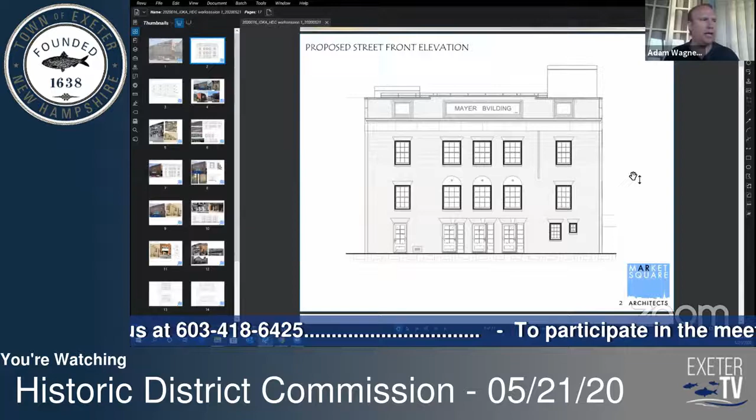Here we have a simple dimensional drawing. This is the proposed elevation for the redeveloped building. I'm going to get into the nuances of what's different between this elevation and what's existing now. We'll also be talking about some things existing now that we don't believe are historic to the building, and that we'd like to bring back to their original grandeur. So here's the proposed elevation. As I hope you can recognize, we're not talking about doing anything outlandish with this building. It's really one of those buildings that we found the particular detailing of certain elements, and I'll be getting into that in further detail.

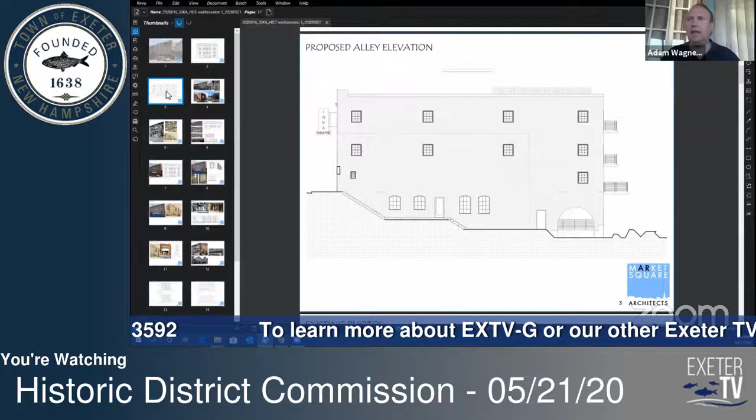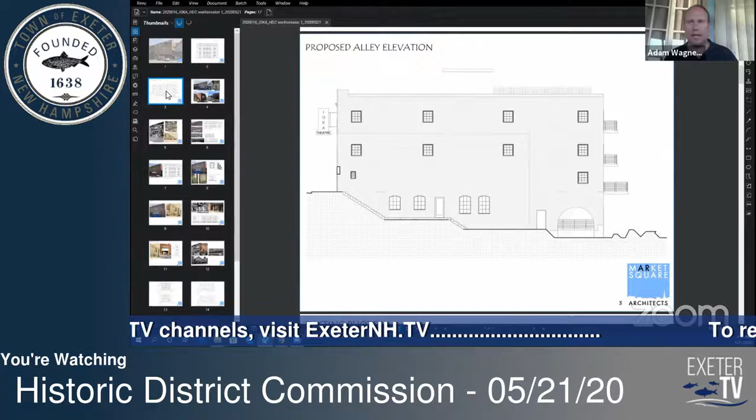With that, I'm going to move to the second elevation. Just to the right side of the building, there is a very narrow alleyway that gets down to the river, and this is the elevation of that alleyway. It's certainly not a prominent elevation of the building, but it can be seen from the street, and we are proposing some changes there. This slide illustrates what those proposed changes would be. Again, I'll be getting into all of this as we move through the presentation.

So slide 4 here, just for reference, these are some existing photos of the building, taken within the last week or so. Masks on, we've had boots on the ground there. As you can see by the dumpster, there is some demolition work going on inside, and we're using this time to really try to get our arms wrapped around the intricacies of this building. There are some unique things that we've discovered.

I'll talk about those shortly, but just to give you a reference point to this whole project, this is the front elevation. This is a view down in the alleyway, actually the lower level of the alleyway, about halfway between the street level and the river level. It can certainly use some cleanup. And lastly, we've got some photographs of the back of the building, really just a blank brick facade with this bump out here.

The next slide I'll show you, these are some of the historic photos that we've been able to find of the building. And with this building dating back 105 years now, certainly it has gone through some variations over the years. And we've been taking a very close look at any photographs we can to try to understand the difference between what may be there now and what was original to the building. And I will be getting into that in some more detail shortly.

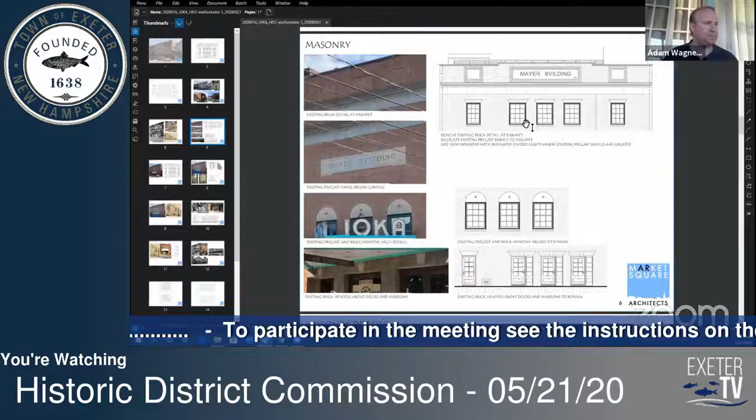The next thing I'm going to move on to is, actually, where was I? There I was. Now we're jumping to here. So again, now I'll pull back up that front proposed elevation. This is the existing photo.

This is our proposed. So in order to get windows here on the third floor, as I said, we would look to take these precast elements and move them up to the parapet level and rebuild those pieces. There's quite a bit of water damage in the parapet. A lot of that is going to need to be repointed anyway.

And the new windows that we're putting in, windows that would be consistent with the original windows of the building. And I'll get into that in the next couple of slides here in terms of what our research has shown us about those existing windows. But the first part here was specific to the masonry. And with that, I will jump into the windows.

So right now there's a bit of a hodgepodge on the building. We took a look at what's there. And over here, you've got a 6/1. Down here, we've got a 6/6. Here, we've got a mulled 2/2. So really, we wanted to get back to the point where we had a better understanding of all these things, what's original. And with that, I'm going to jump ahead a slide and then end up coming back to this.

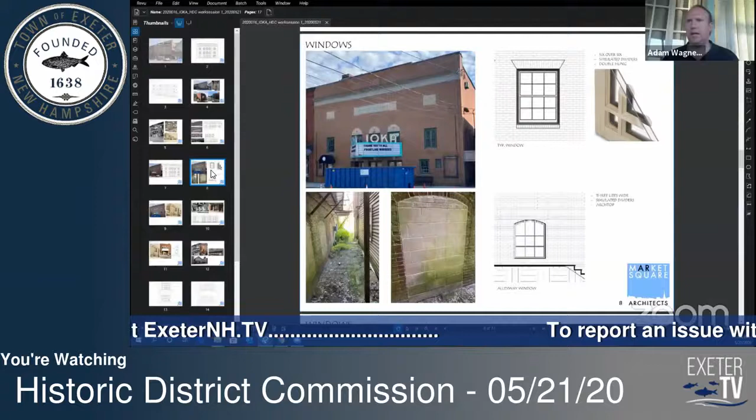So going back to where I was, our proposed solution to this is replace the existing windows with 6/6 windows. And what we would propose to do is a simulated divided light. These would most likely be a fiberglass window. But instead of doing single hung, which is what we think the originals probably were, we would propose to do a double hung here. And the reason for that is with the simulated divided lights, the windows get dirty pretty quickly. And with a double hung window, it's easier to wash it.

So from an aesthetic standpoint, you're not going to notice a big difference. From a functional standpoint, we can keep the windows cleaner for a longer period of time. The other thing I want to point out here on the window slide is down here in the alleyway, you can see these arch top CMU openings. We don't have any great historical photos from down here, but we believe these were all windows at one point.

And so our proposal would be to take this CMU block out of those openings, use the existing headers, you see the archway right here, and put new simulated divided light windows in their place. We haven't been able to document its existence, that that is what was originally there. But we think common practical architectural sense tells us that that was the case. So really we're trying to bring back as much of the original as we can in regards to the windows.

And yet at the same time, we do need to cut some new openings because of the function that's being proposed on the inside. And the predominance of that is here on the third floor level, some in the alleyway facade, and then certainly on the rear facade of the building. And I'll be getting to that in the slide shortly. So this I already discussed, the existing windows that are here now, the originals and what we believe they were. And with that, I'll roll into the doors.

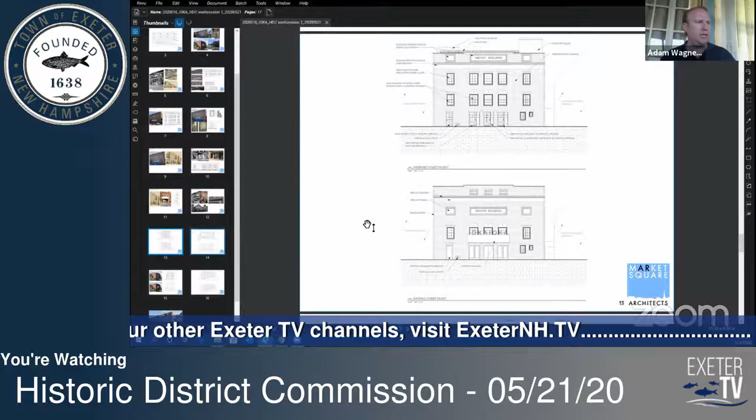So with that, get back into drawings here. And this is just as a comparison. So here's the current facade of the front of the building. Things to note, the marquee sign here, the IOKA lettering above, the Mayer Building precast here on the third floor with these flanking precast items.

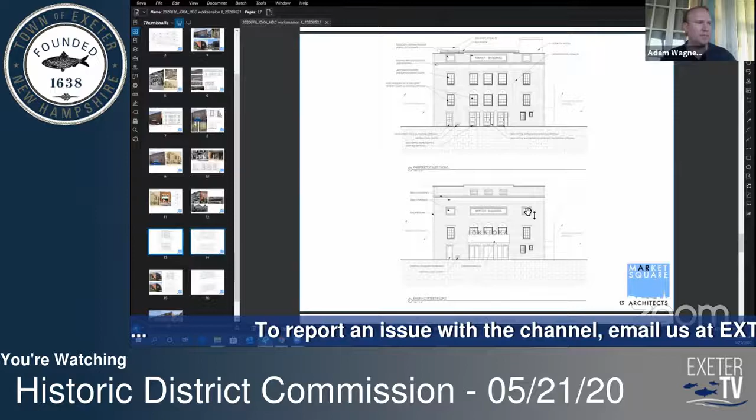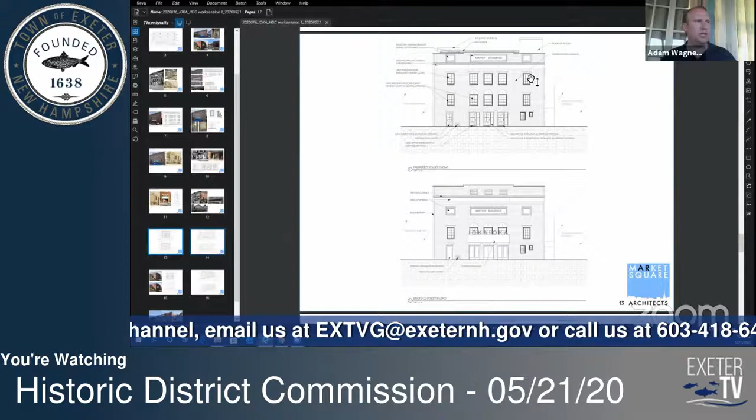And again, we're looking to take that piece, move it up to the parapet level so that a new collection of windows can be added here on the third floor. And again, all of the windows will be brought back to 6x6 simulated divided lights. And we already talked about what we were proposing for the doors.

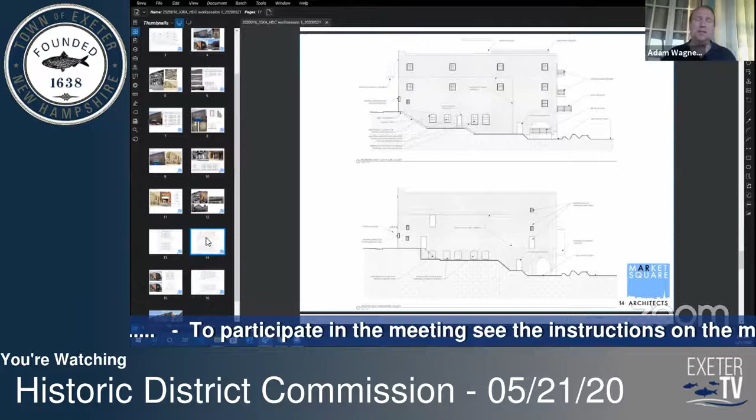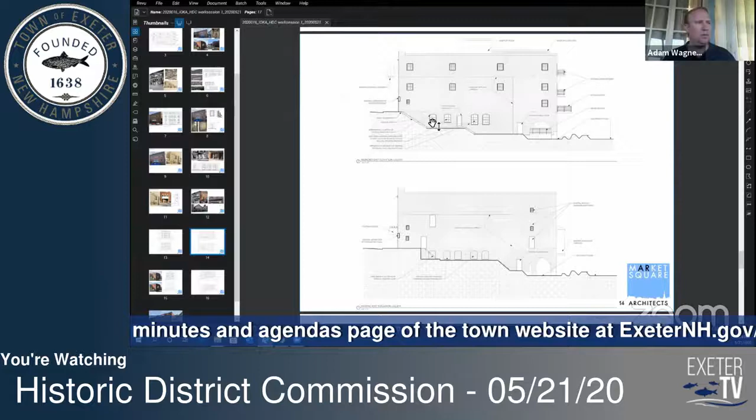Next elevation I'll show you, this is the alleyway elevation. So the two buildings are only 4 or 5 feet apart. You really never get to see this view just because you can't get far enough back from that facade. These are those blocked in arched openings that I had talked about. We're looking to open those back up, turn them into windows again.

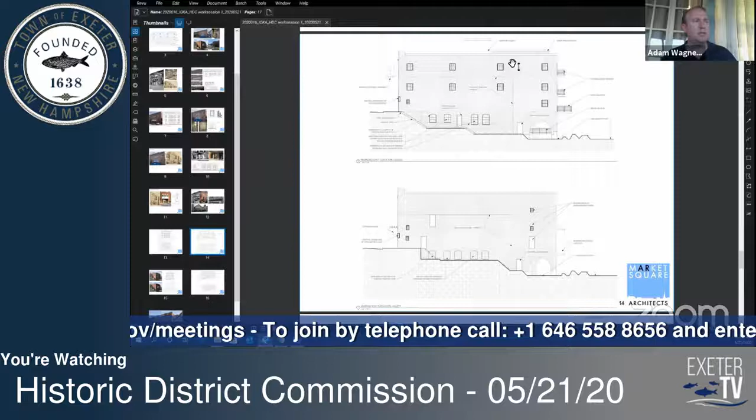The rest of this facade is really a blank brick wall, as you can imagine a theater building would be. And based on our new function, we are looking to put some small windows in here. Again, they would be 6x6 simulated divided lights to replicate the windows on the front.

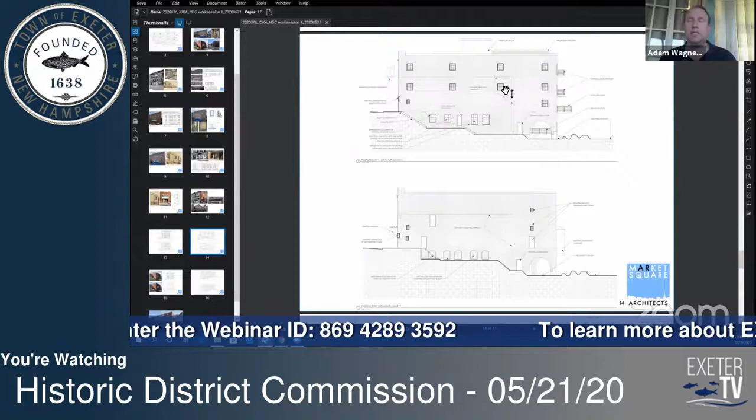But we would propose not to do the masonry detailing on this facade in the way it's done on the front facade, because had these windows been constructed when the building was, we don't think they would have done that brick detailing the same way. Just like they used a less expensive brick to wrap the sides and the back of the building, we don't think they would have used those masonry detailings for the window headers and that sort of thing.

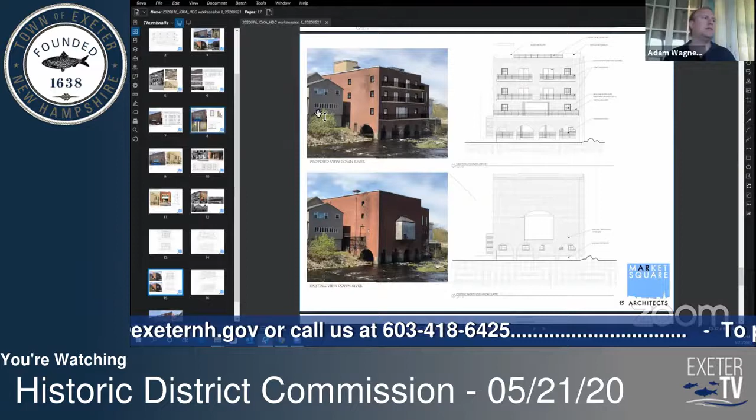Next facade I'm going to share with you is the back facade. So here's the rear of the building. And as you can imagine, with a theater with a fly loft, not a lot of need for windows back there. There is this wood frame bump out that was added to the building. And based on our function and what we've seen on other buildings along the river here, the glass on the other buildings and the outdoor balconies is much more celebrated because it was functional for those buildings, whereas for a theater building, it wasn't functional at all.

But based on our proposed uses on the inside, we're proposing to build some decks off the back, put in sliding glass doors, and again, windows that would be consistent with the other new windows we're proposing for the building. This area here is actually the opening for the bump out, so there's no brick in there. We're proposing a little bit larger piece of storefront glass, and that ties in with the first floor proposed use.

And the openings there, the headers there, we just think it would be a nice option to really create a beautiful indoor space coming out to that deck. Here we have existing elevation, proposed elevation. And with that, I will move to the next slide.

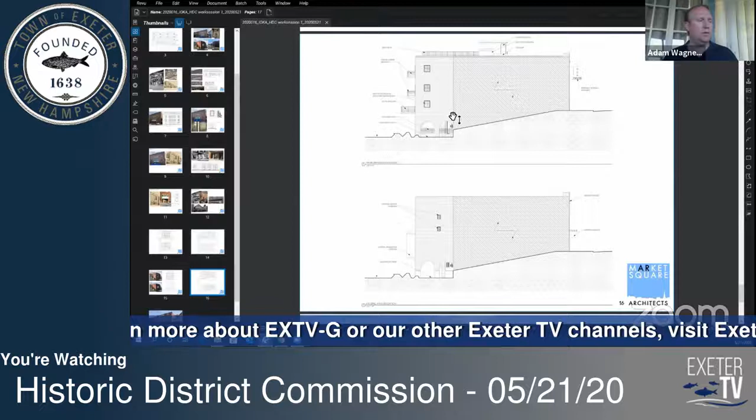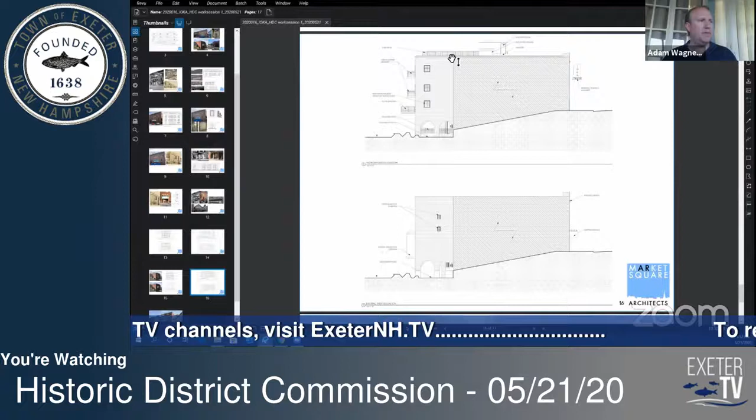And this slide is the other side of the building, opposite the alleyway. There is a building that shares a party wall right here, so that's where you see the hatched area. So the only portion of this facade that you see is this piece right here. I think you're not going to see it in the other photo.

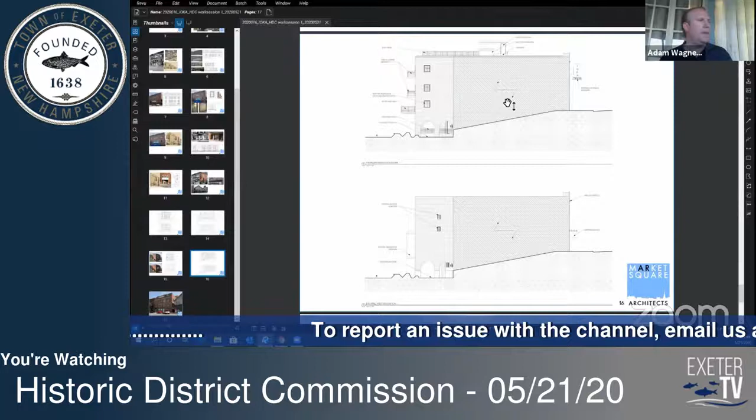So again, there are two tiny little windows here, which are basically backstage windows. And we would be proposing to put in more functional windows, again, with the detailing of the window and masonry that's consistent with the rest of the backside of the building. Here you can see these decks.

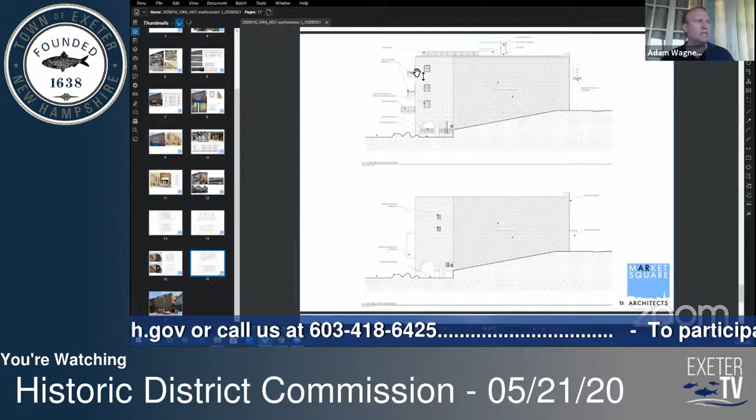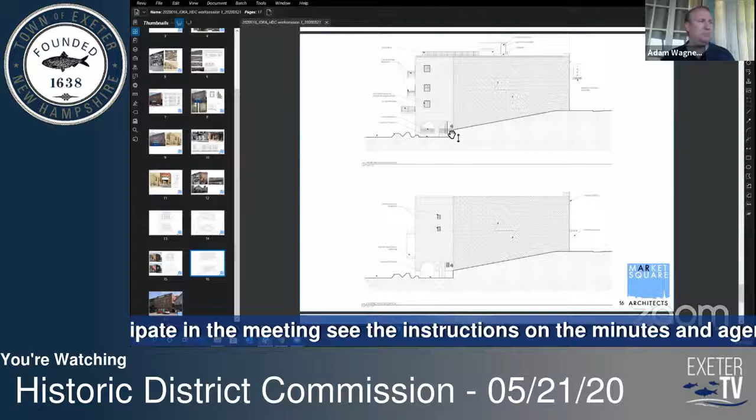We are looking at putting something in the archway down here because it's really cool space and we think we can make it functional. And I think on a night like today, it would be a beautiful spot to sit out right by the river and have the water flowing right by.

And then lastly, I'm just going to leave you again with the overall proposed facade of the building. All the components that I talked about in the last 16 slides here: moving the precast up to the third floor, replicating windows on the third floor to match up with what's on the second floor already, replacing the doorways on the first floor to go back to something that's much more historic, putting something back in that's much more reflective of the original sign of the building. And we don't have it shown here, but we're exploring what our options could be for that canopy.

With that, I'll hand it back over to you, Mr. Chairman. We'd be more than happy to answer any questions that we can, and love to hear your thoughts and feedback. And I will leave this up so that if anyone wants to flip to a particular slide, I can do so.

Okay, thank you very much for that presentation and for leaving it up. I'm hoping that others, if they were taking notes during this, were referencing their comments by slide at the bottom there of 17. And what I'm going to do is call on our commission members for comment or questions for the applicant by going through.

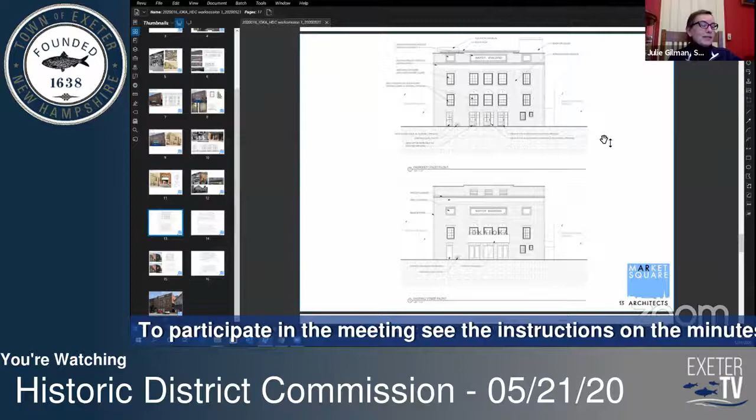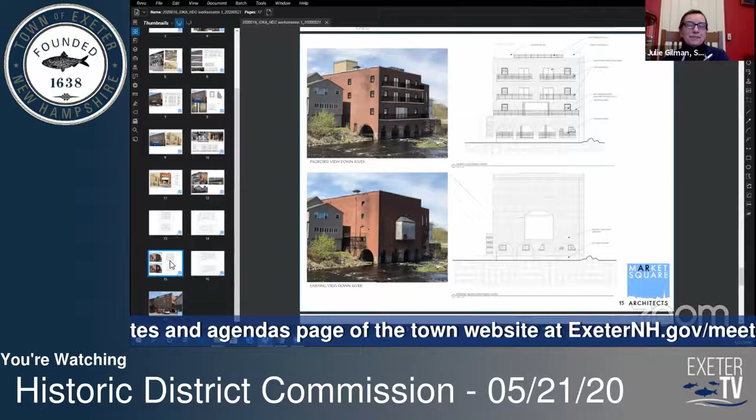And on the back, if you're going to use the bottom level at the river for a deck, et cetera, you're going to block the air conditioning. That's how the building was air conditioned, from ducts from that lower section. That's why the sign that used to hang on the marquee said air conditioned; that's how it was, sucking up cool air from the river.

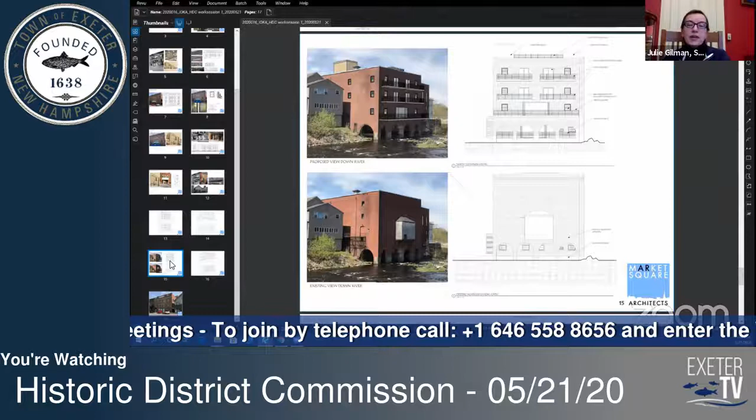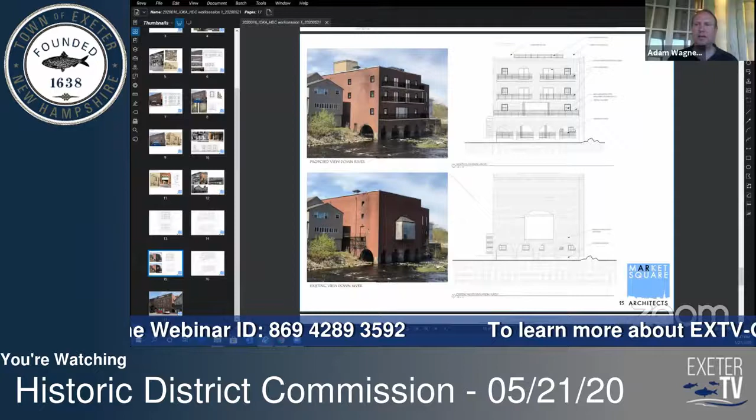But that brings me to a question which is not, again, in our purview. I'm just curious. Are you going to be disturbing the riverbed at all so that the Army Corps of Engineers has to get involved? So that's a question, I think, for Adam. Yeah, I'd actually like to defer to the development team on that, just because I'm not a civil engineer. I don't believe that is the intent to disrupt that. Sure. But if one of them could jump in, that'd be great.

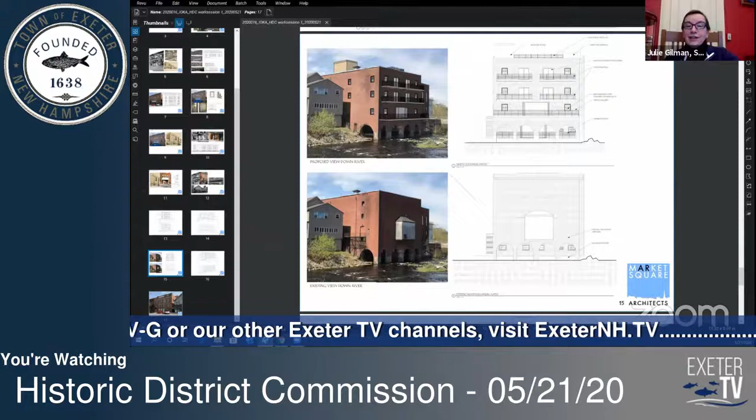Yeah, no, I'm sure it's not the intent. I just want to be sure you're aware that if that's going to happen, there's another layer of stuff you're going to have to go through. I think that's all I have for right now. I appreciate the work that you've done, and the side elevation is what it is, really. It wasn't ever meant to be a showy piece, and you're going to use it in the way it needs to be used for your use.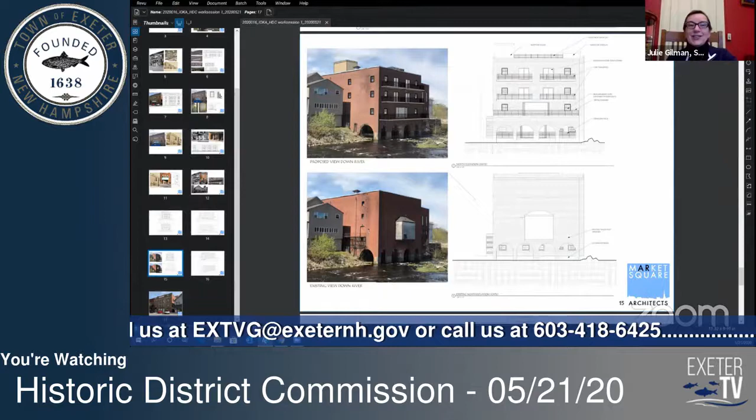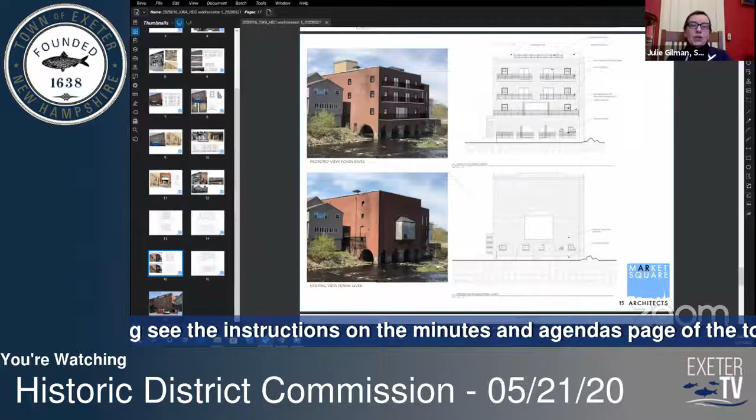So thank you. And I also do have the concern about the head height of the either elevator or stairway or HVAC, whatever's going up on the top there. We've talked about that with many properties along the riverway because of the view from across the water, that we want to see it screened, whatever you're putting up there, HVAC or whatever, that it's either screened or a color that blends with the sky, something that diminishes its bulk. And that's it. Okay.

I believe that's everyone that we've got on the board. So I'll take a few minutes to make some comments and questions. First one I have is a question for Adam and the development team about the construction sequencing of removing those precast panels. I assume that the only way to do that is going to be to jackhammer those out around the existing brick facade that's there, to destroy the rowlock that's there to get that panel out and removed. Is that the thought behind that?

I think they can probably be saw cut out without hammering. Anytime you're introducing that level of vibration into a mix, you're asking for trouble. So I think, we haven't gotten into the detail of that, but I think a masonry saw could probably be used. As you can see, the Mayer building sign is actually 3 panels already. Mm-hmm. You can see small joint lines here and here. So we're going to have to be very careful with how that's done, but that's really getting into construction means and methods.

Yeah, the question behind that would be that the preservation of the panels is obviously preferred, and we appreciate that. The manner in which that's done, not marring or scratching or cracking so that the panel then has to be recreated, would be to the detriment of the elevation, I believe. So I just wanted to bring that up in comments.

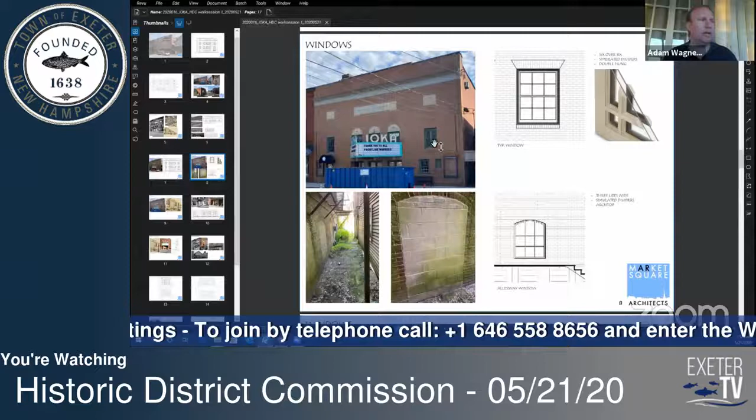If that isn't going to be an option, I think we'll have to look at how we can custom trim out these windows. With the windows being fiberglass, ideally we would look at some sort of a non-wood product that we can match the profiles and mill the profiles without having to worry about the maintenance and the upkeep of a wood window. So that could be done in AZEK or plenty of other materials.

Okay. And is the intention to have the window fiberglass all the way through, or is that just going to be a veneer and a cladding on the exterior? Will it be a different material on the inside? No, we were looking at fiberglass through and through, a full fiberglass window, not a wood window, not a clad window, I'd say.

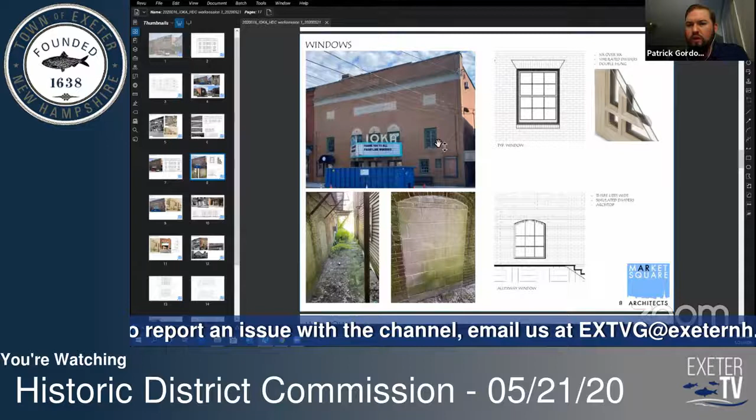All right. So when those windows then are removed, the sills that are currently there now, I believe they're called out as rowlock sills currently? At least that's what the depiction shows. Yes. Okay. So you'll take care to do the proper flashing underneath those windows to maintain those sills? Yeah, I was looking to see if I had a better close picture, and I'm not certain that I do.

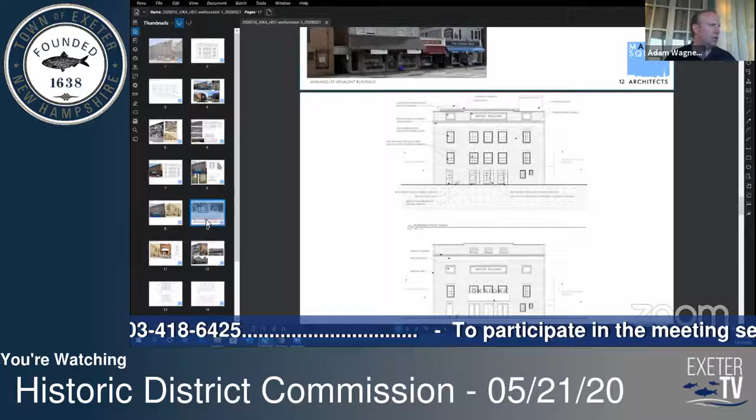But I've done a lot of mill renovation projects in my career, and it seems like all of those buildings have slight nuances in how the window installation was done. And I think for a building like this, we're going to need to pop a window out to understand how that flashing is going to work, where that building sits, what it sits against. And we just honestly haven't gotten to that point yet.

Okay. So then I just ask to take care if there is any elevation or slope to those existing rowlock sills for positive water drainage off of those to try to maintain that. And if they are actually flat, with the introduction of a new window being placed in there in new construction, to flash it properly and use a subsill to actually create drainage away from where that's being set in.

Next question I had was that you mentioned at the proposed openings, is it the intention to use the existing brick where you're punching new openings as the brick for the new window headers and such, or will it be new brick made to, or try to be, color matched as closely as possible?

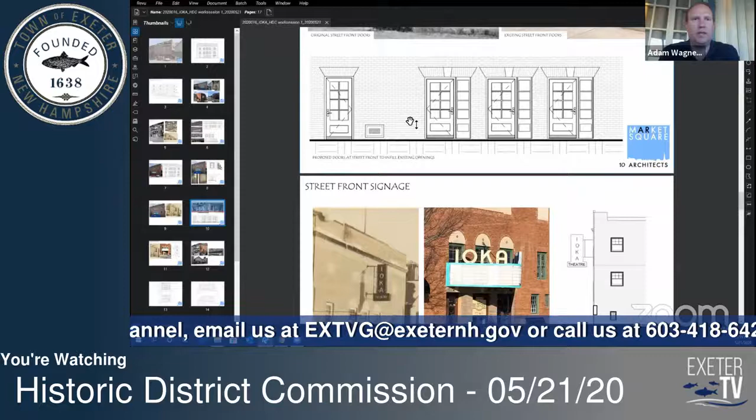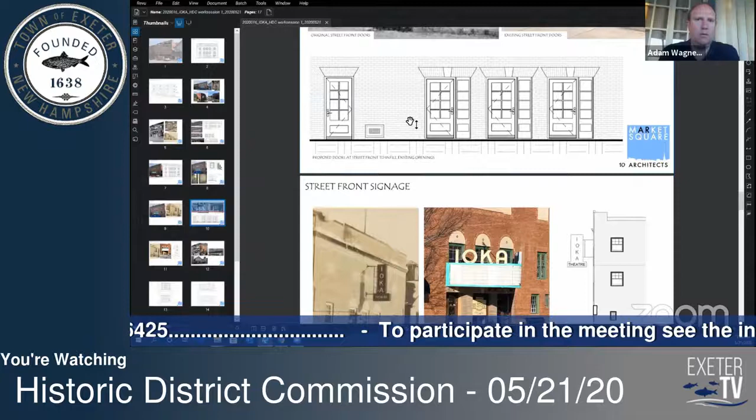Yeah, so I think in this case, trying to recycle the existing brick as it comes off and knock it back, it would be very challenging. What we would propose is that we go out and really spend a lot of time color matching a current brick to what is there now. And again, that's something that we need to get the samples and then we need to get it out there on site, and current conditions just haven't allowed us the flexibility to do that at this point.

Okay. So then I guess we would ask. Mr. Chairman, I was just going to add that we will want to do the exact same thing with the mortar color. Okay. Thank you. Going forward, if this application proves to be successful, we'd like to request as commission members that we would do a field walk when those bricks are being sought after for color matching. Just because we've seen the new construction and the best available match color, and it sticks out like a sore thumb. So I would just ask for that courtesy. Yes, absolutely.

Sticking with the brick theme, I believe it's slide 10 of 17 that shows the depiction of the doors. Are we on there now? Okay. Yes. So the image in the upper left-hand corner shows the original street front doors. Do you see the depth of the jamb of those original doors? Those are obviously, I would believe, an in-swing door.

And this picture would seem to prove that you have the depth of the wall to be able to replicate something like that in new construction, in lieu of pulling the proposed doors all the way out to the front of the facade. It may give you some elevation, some pitch. I don't know if it would be ADA compliant, but you may be able to ramp into the building.

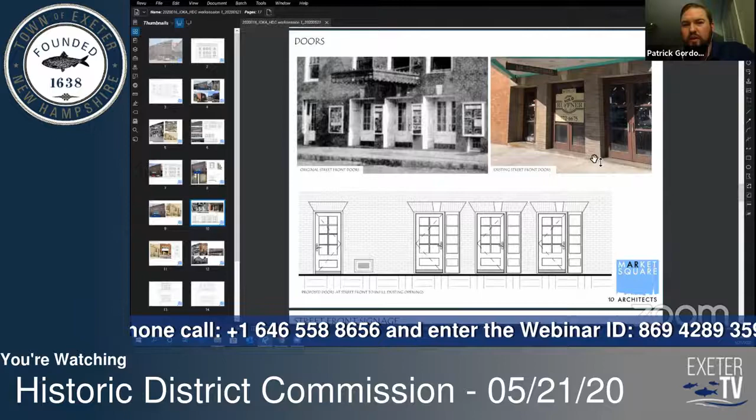So I just wanted to point that out as an opportunity to perhaps inset those doors for your ADA compliance, to be able to ramp up to, because we are going to get into, in terms of ADA compliance, the clear door area available out in the public right-of-way for entry into the building. And I honestly am not sure if we have the depth on the sidewalk currently that allows the public to pass by and also have that clear area available for ADA compliance. So I bring that up as a point.

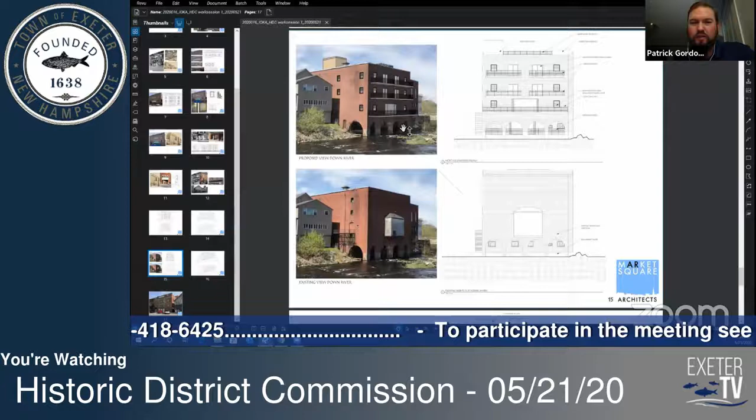Julie stole my thunder a little bit on the rear first floor deck, asking Army Corps of Engineers if there is anything that is going to be touching. If that deck is anything but suspended above the waterway, Army Corps of Engineers is going to require a review, because that is overflow freeboard for any major storms. And they just redid all the 100-year FEMA flood maps for the removal of the dam. So we know that they're very aware of the void space that's there. If a new deck was going there, they would need a reevaluation of that.

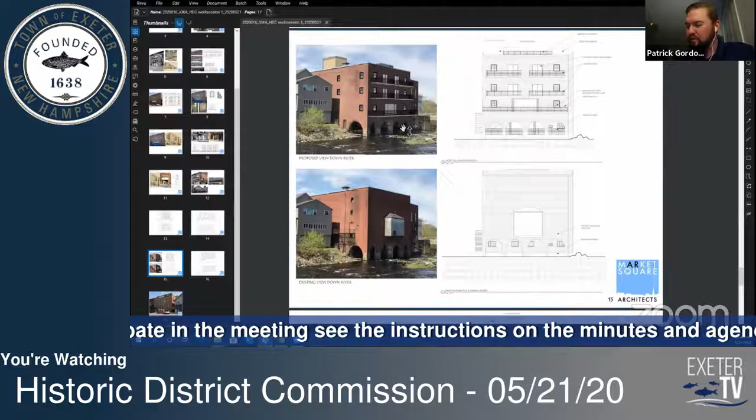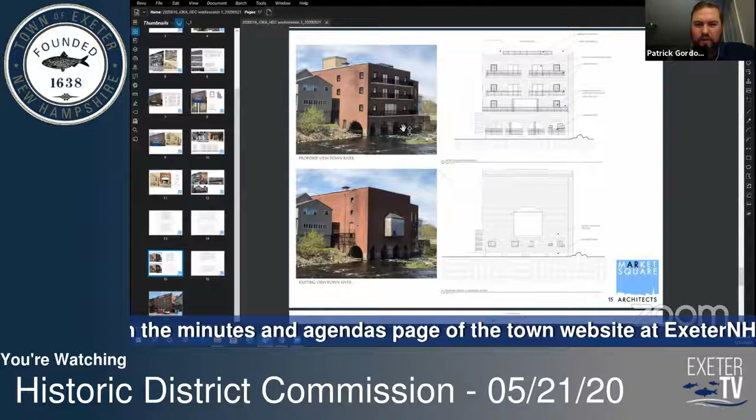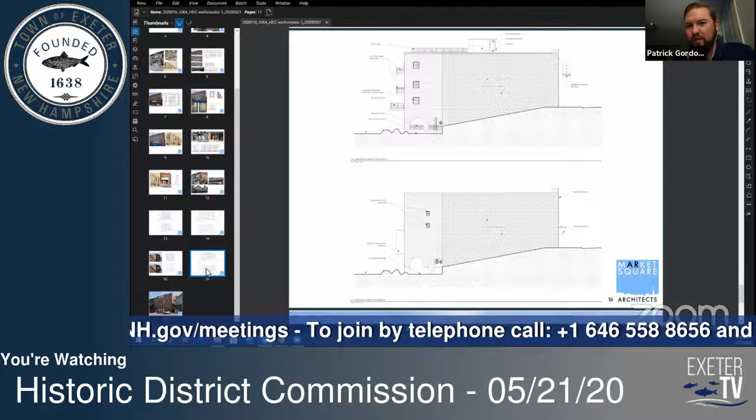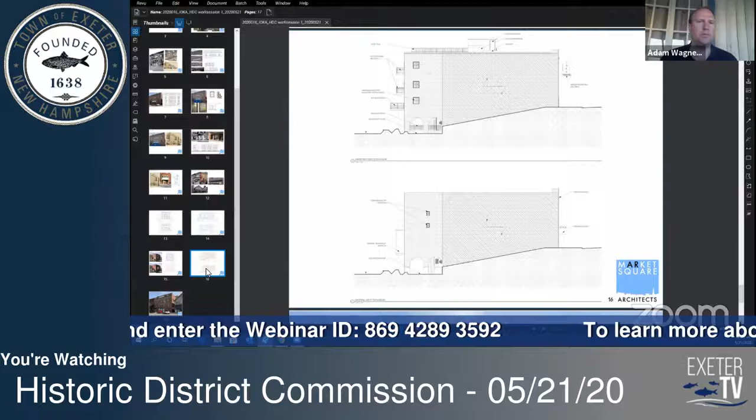And then the last comment I had, actually slide 16 of 17, if you could go one more. It appears in the elevation that the balconies off the back are a true cantilever, and that there are no support brackets above them or cables tying back to the building in any way. Those are intended to be a true cantilever? That is correct. Part of what's going on inside the building is new structure that will allow us to do that from a structural standpoint.

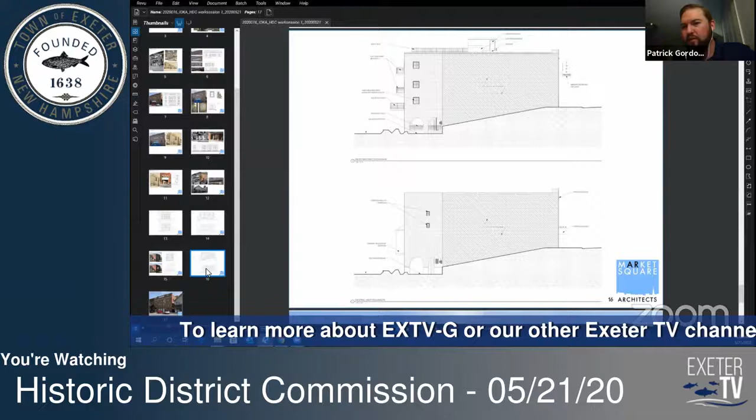So can we assume that these will be steel beams of some kind that have the 1/3, 2/3 span to create that cantilever? Yes, there will be supporting steel coming out of the building to hold those decks. Okay.

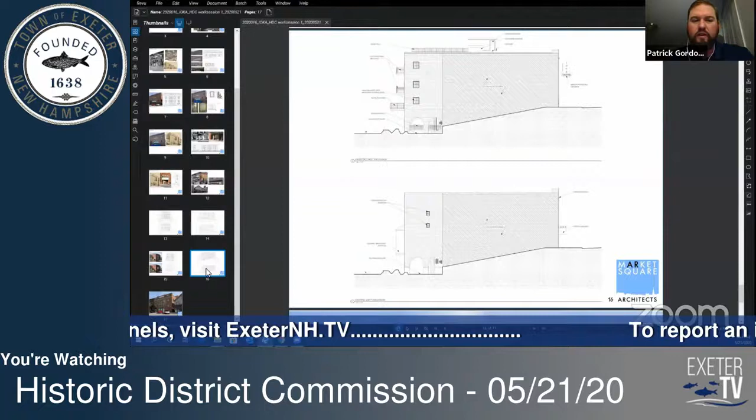And then the last comment I had was about the marquee in the front of the building. We haven't seen any interior floor plans, not that we necessarily need to, but it seems like the request for the removal of the current marquee is really because it is impairing the view from the residential units that'll be in that area. Can you tell me, on that second floor, how many units this would be impeding the view of?

Adam, this is David. Do you want to answer that? Yeah. This is David Cowie, one of the owners. Currently there are 4 units planned for each floor. Okay. So that would be blocking the views of 2 of the units towards the front. So with the symmetry of the building, that center window is in one of those 2 units. So 2 of the windows will be blocking one tenant and 1 window will be blocked for another tenant, I assume. Yeah, we have the floor plan layouts, so we can definitely share that information. Okay. Yeah, we did get that in our packet.

The floor plan? Yes, we did. Okay. All right, I'll take a further look at that. So the questions that I wanted to pose or comments about the existing marquee, this is more a question for one of our commission members, Pam, as a representative of the Historical Society of Exeter. Do you know the date that marquee was installed?

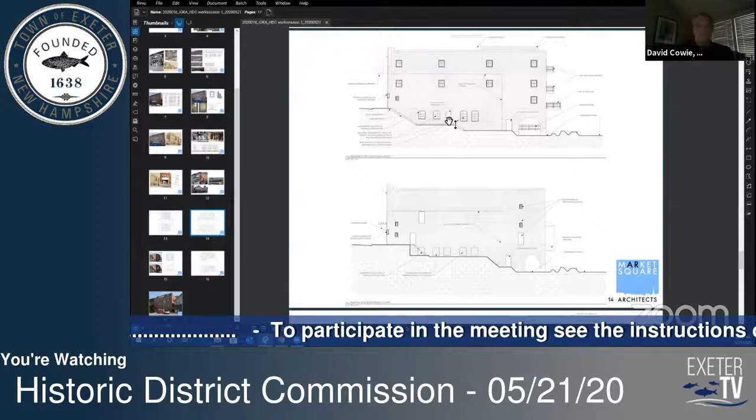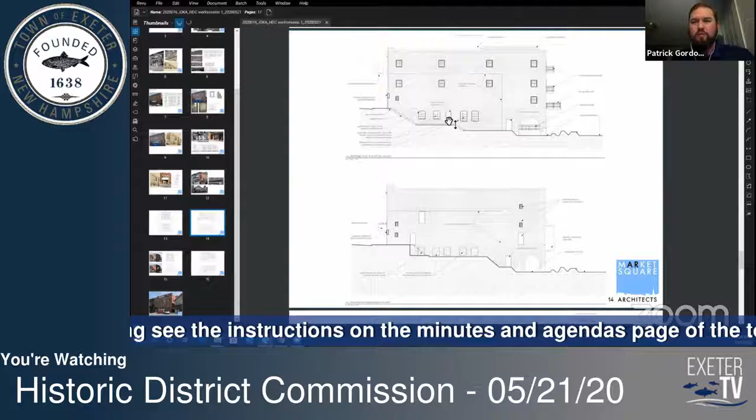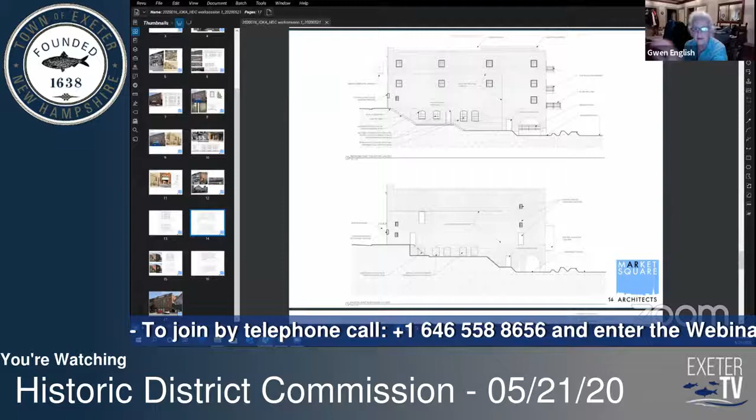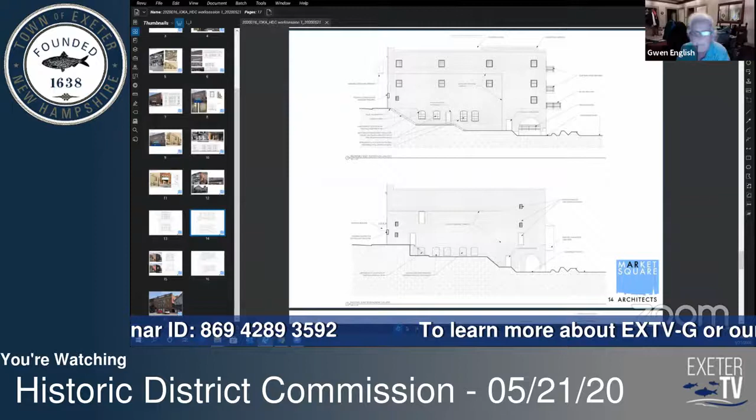Okay, great. So then I am going to now switch our focus over to those that have their hand raised from the public. And I do have a... Hey, Patrick, may I interrupt a minute? I think Gwen wanted to say something. Okay. I'm gonna ask that we use the hand raise feature as much as possible, just so that we can try to make sure we hear everyone's comments. Can you show me where it is on this screen? Because I've known where it was until this sharing of the slides came up, and now I can't find it. So I don't know where to raise my hand. Bob or Exeter TV, can you help Gwen with that question? Well, yep. If you move your mouse to the bottom of the screen, you should have a little button that says participants. Oh, yeah. And if you click that, it should be at the bottom of the list. Okay. All right. Great. I will know next time. Thank you. And I'm sorry for that.

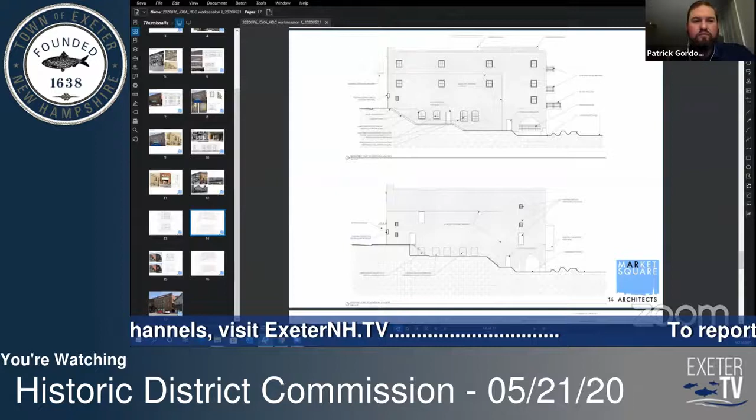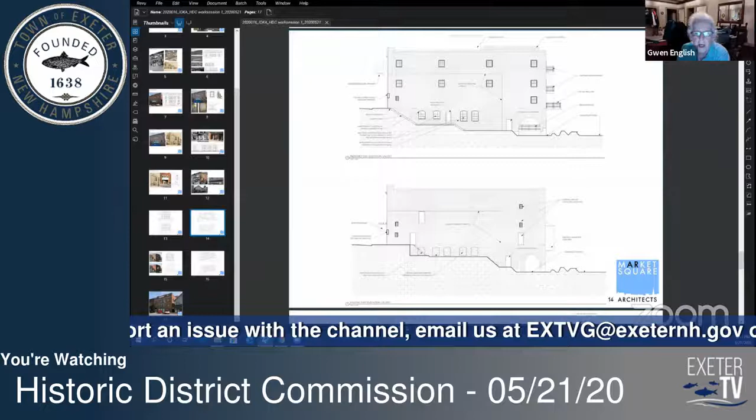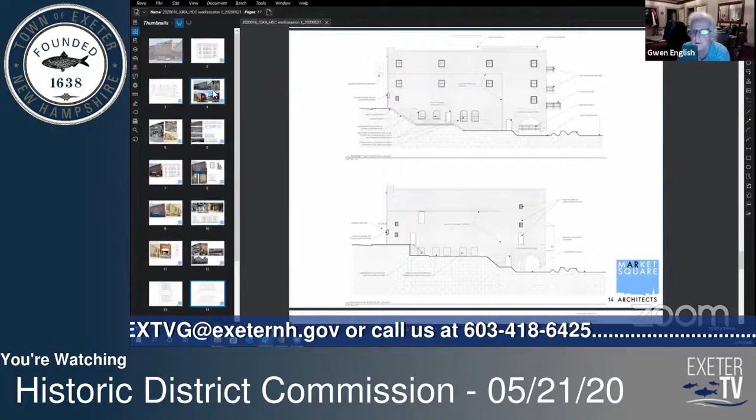I just have a question. In the packet, you talked about the paint colors that you had discovered as you were working on the building, and your thoughts were that initially most of the windows were painted white, and I'm not opposed to the black windows that you have presented in the packet, in the presentation, and it does lend itself to a more modern feel, but I would just be curious to see what it might look like.

And I don't know if that would be a massive undertaking to do a mock-up of this building with white windows. It's kind of a nice soft look, and where the building is, it's big. I don't know that I want to use the word harsh, but it would be kind of interesting to see, and maybe the other board members would not agree, and I won't fight for this one, but it would be interesting to see what it would look like, and perhaps see what it looked like back when the building was built and perhaps had white windows.

I agreed with a lot of what the other board members have said, largely about the symmetry of the front doors and the simulated mullions in the windows. I think there were some great comments made, but the color of the windows and doors was the only thing I would add to that, and that's my final comment.

Thank you. So just as a preamble to that, at the HDC, we do not have purview over color, unfortunately. Okay, so, I'm new. That's okay. But we typically make recommendations in terms of what we feel would be historically appropriate for the era, for the style of the building. But ultimately, it is the applicant's decision to take our recommendations or not. But thank you for your recommendations. Okay. So go ahead, applicant, if you'd like to respond to that.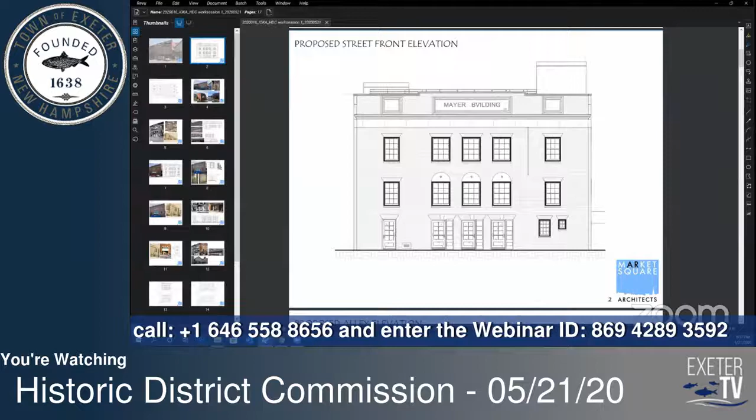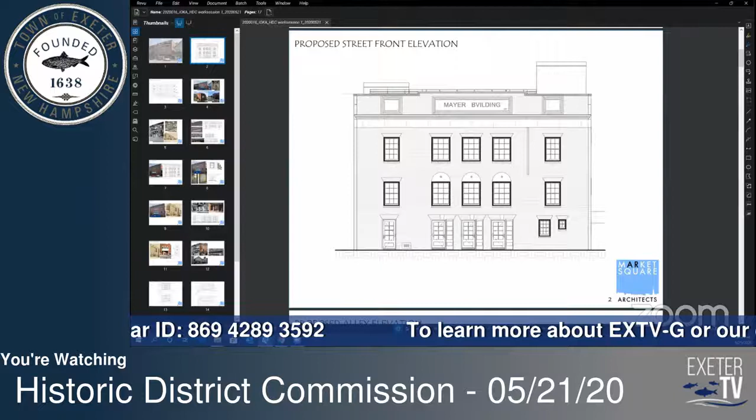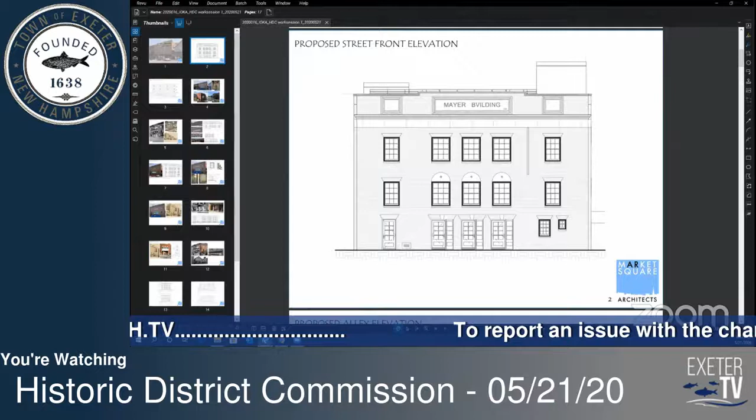And I also noticed how flat the building looked with the new rendering, with the new idea. And I didn't realize that was going to step right out into the street. The backdrop of the original doors was much more aesthetic. I did agree with, I don't remember his name, a gentleman speaking who was an architect who was concerned with the structure on the roof there too. I agreed with him on that, and preserving the historical nature of the building.

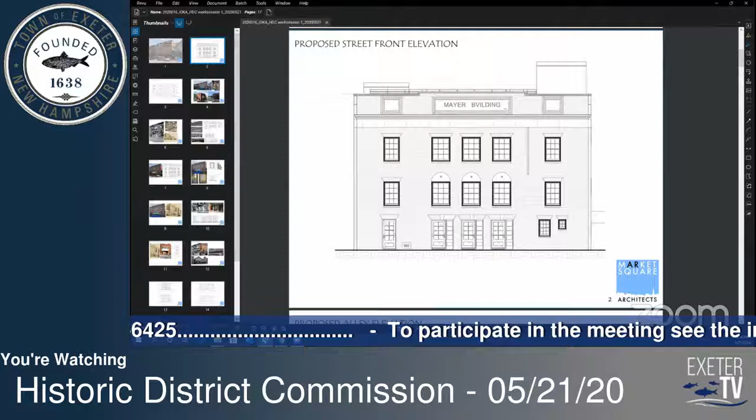What really concerned me was that Laurie A. Couture said, I would be happy to rent that unit so that we can keep the IOKA sign. But obviously, blocking the tenant was not the main reason they want to take down that IOKA sign, because the owner did not even want to say, yeah, sure, we can keep it now. That obviously was only a ruse to get it through, because she is saying, I will be happy to have that IOKA sign there and rent the unit.

So that is a moot point. We don't need to remove the sign if she says that. And yet it seems that the owner still wants to remove it, and that is quite confusing to me. And like I said, I am concerned about moving the cement

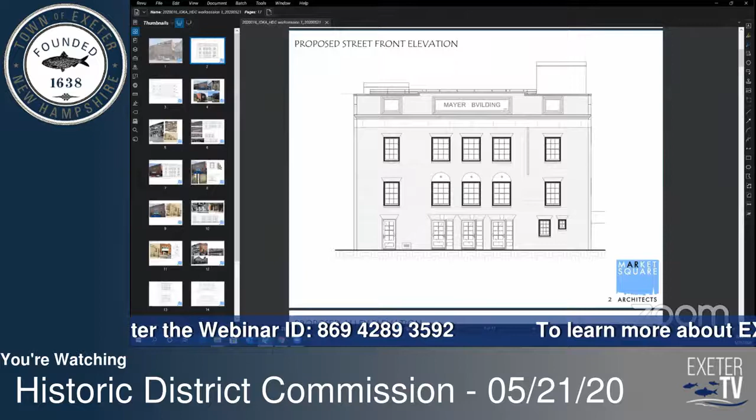or even the brick. You know, there are a lot of historical brick, or maybe they could even be very careful about removing it. I'm sure they are careful when they work on historical houses, such as Strawbery Banke. There's a lot of information people could get from a place like that, where they preserve everything. And even Exeter has historical houses. There's a historical society in Exeter.

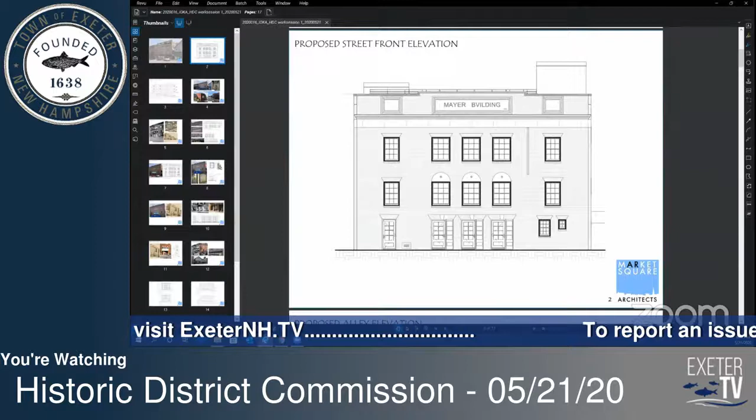So if that was the intention, to preserve the historical look of the building, we have a lot of very educated people that have knowledge of this in our area, because this is New England, and it would be very easy to access those people for their advice. And I think that's all I have to say. Thank you.

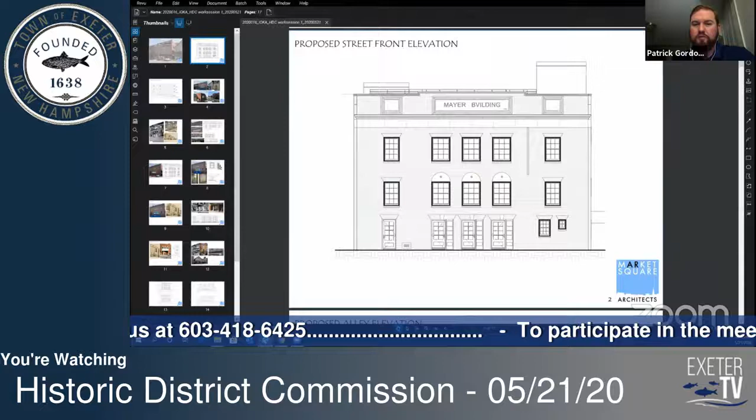Okay, thank you, Linda. Just a point of clarification for the rest of the viewers and participants. The arched tops that are in the center three windows on the second floor, those precast panels are to remain, is my understanding. Those would exist and they would not be removed. Those would remain. Okay.

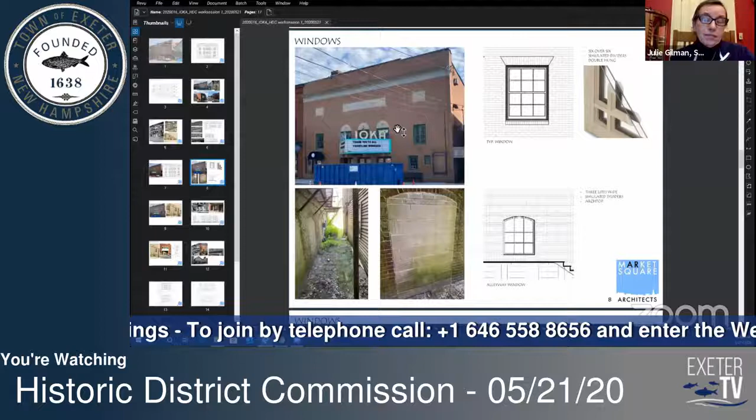With that, I'm going to close. Let me check one more time if we have any other hands raised. We do. Julie has a hand raised. Go ahead. Yeah, I would just like to speak to the public that this particular meeting is just a review and no decisions are being made about anything that we've been discussing tonight. And I would stay away from making assumptions or assuming an answer by anybody that's presented tonight from the architects and engineers, designers, and the owner.

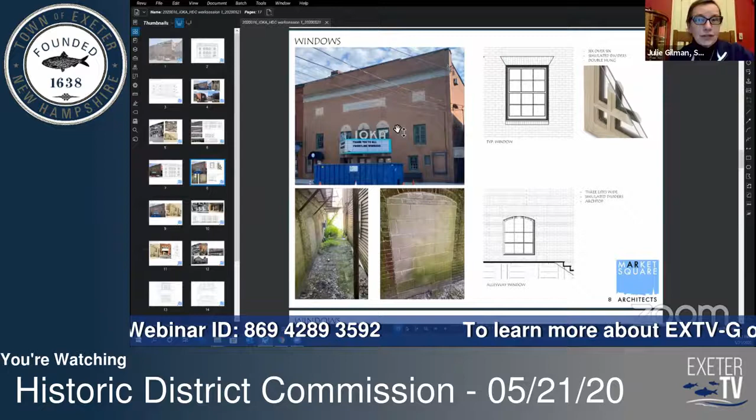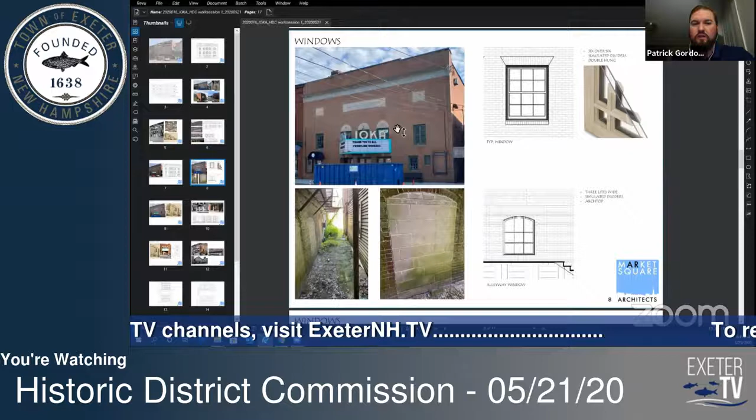I don't think it's fair to have that conversation. And this isn't the place to have that forum. But I thank you for your comments. Yes, thank you, Julie. I think they were clear about collecting information tonight, but not necessarily having any rebuttal or making any concessions tonight or having that discussion. So that will be in subsequent meetings.

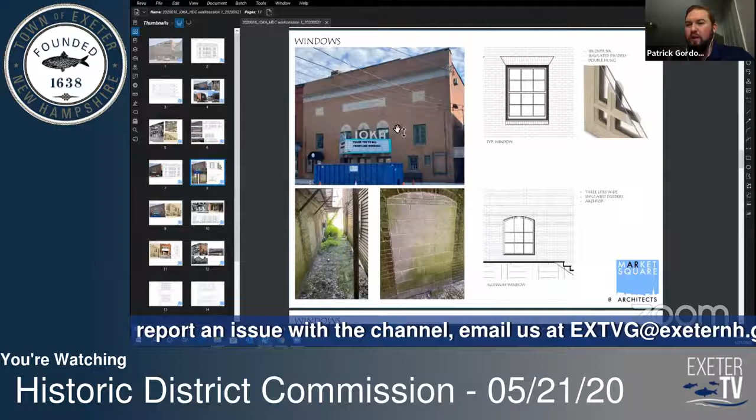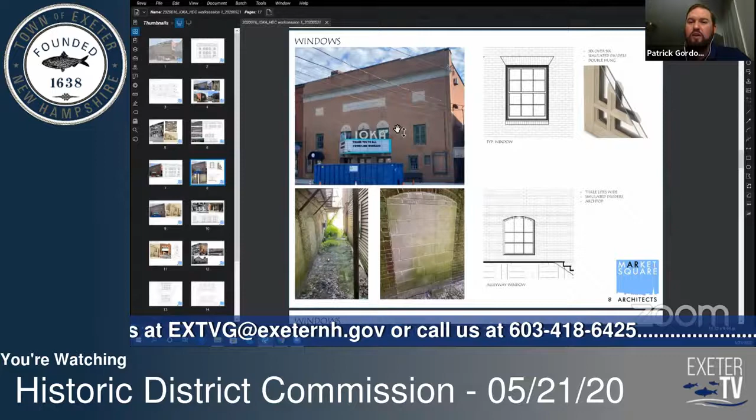And with that, I do not see any additional hands raised at this time. So I'm going to close the public hearing for this application at this time and thank the applicant, the architect, and everyone for participating and providing your comments and questions. I think it was quite productive given the circumstances that we are in right now. And I truly appreciate the level of detail and the level of work that went into this application. So thank you very much.

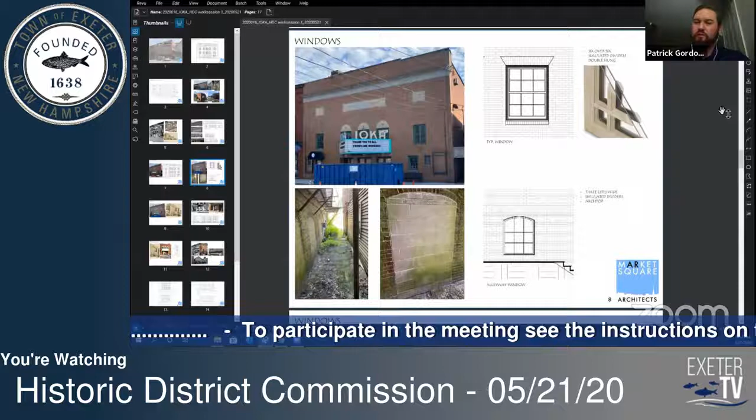Thank you. Thank you, Mr. Chair. Yeah. And with that, feel free to hang out and listen to the rest of our meeting. But if nothing else, feel free to bow out digitally.

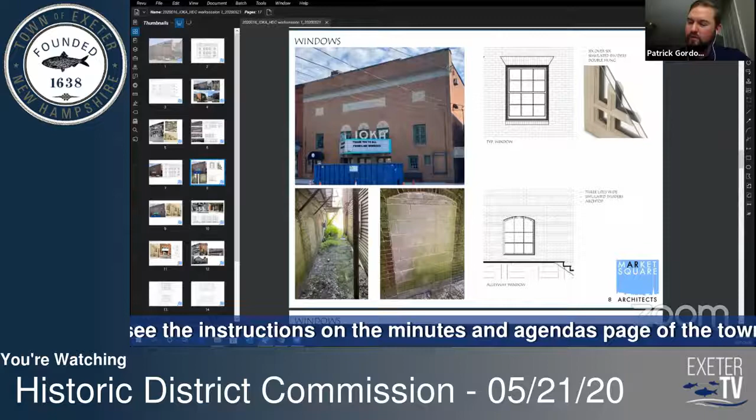Under other business, we have the approval of minutes for February 2020. And we also have the election of officers for, I can't believe it, it's May again. So the approval of meeting minutes, commission members, I think we can do this in more of a free-flowing way if you want to unmute yourselves and give comments about the draft minutes for February 2020. Any revisions that need to happen. Take it away.

Pam, go ahead. Yes, just some spelling errors. On the front page, seven lines up, it talks about she, meaning me, does miss the lattice work. And the next says that the lattice was very thick. Well, lattice is spelled lattice, not Latus. This is why you shouldn't trust spell check. And

again, on the very last page, four down. We're talking about 7 Oak Street. They came in on a Sunday and razed the house. But we want to spell it R-A-Z-E-D, not R-A-I-S-E-D, which would mean that they lifted it up, which they didn't. Gotcha. Okay. Yes, thank you. All right. Curtis, Doug, Gwen, any others?